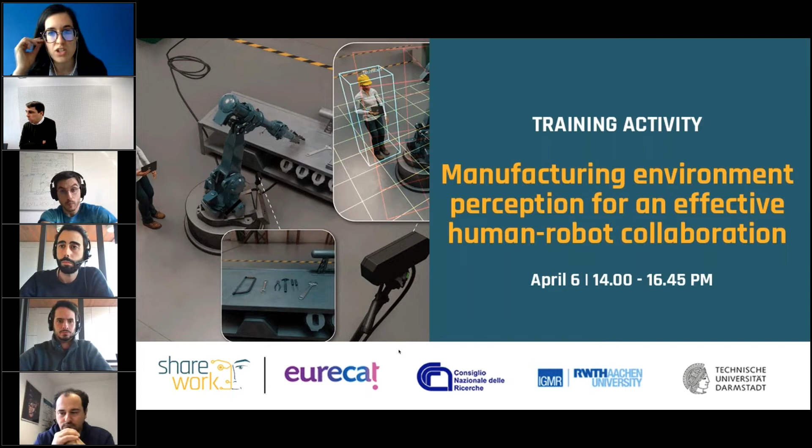So we are going to start with the first of a series of training workshops being organized by Sharework project. Sharework project is coordinated by Eurecat, and we work towards providing collaborative robotics the necessary intelligence for an effective adoption of human-robot collaboration in industrial shop floors. And this session today will focus mainly on perception.

And we are willing to present several perception techniques to increase collaborative robotics knowledge and skills to perceive, comprehend, and reason about the surrounding environment. If we go to today's agenda, we will be combining several presentations on specific topics ranging from ontological approaches to object detection, human tracking, primitive learning, and how to understand human actions for a better human-robot collaboration.

And we'll be combining those theoretical concepts together with small surveys that we will be launching in between presentations, in which we will be testing some key concepts that will be presented in the following minutes. And after that, we will also try to put as many examples as possible from the project to make sure that we can see some applications of these concepts today.

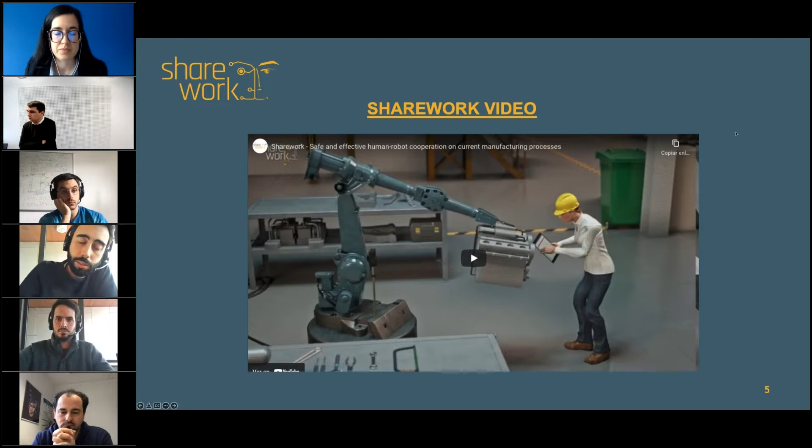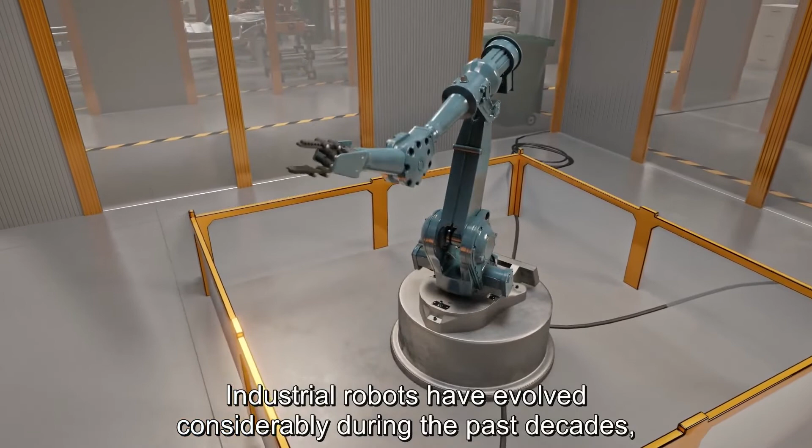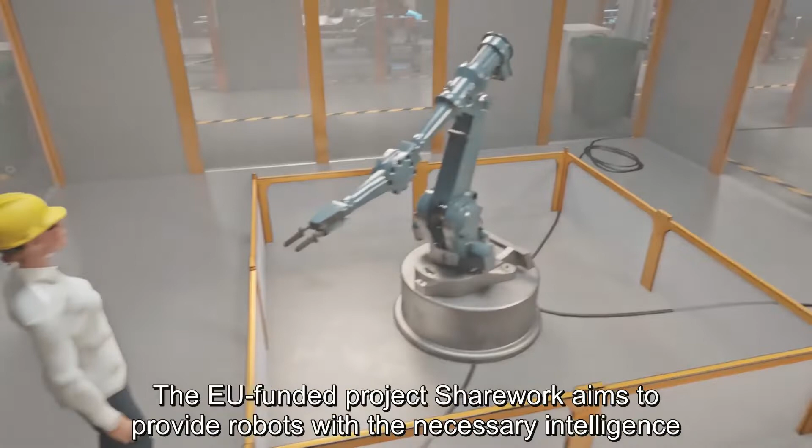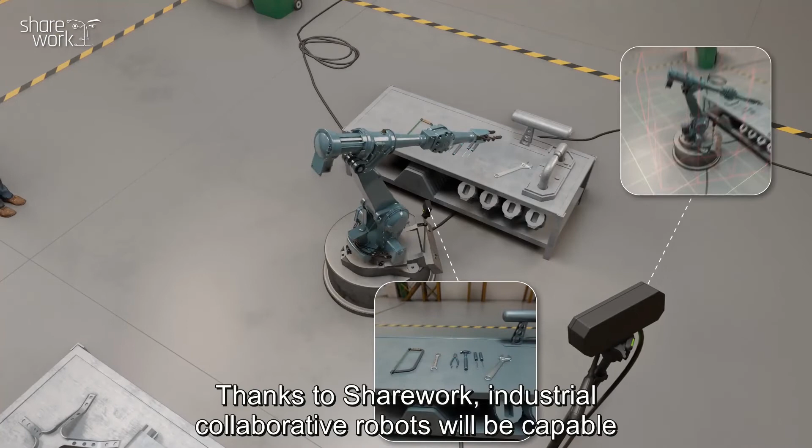So I guess we're going to see a video introduction of the project. In the age of Industry 4.0, the industrial landscape is being transformed by technologies, allowing factories to be more connected and automated. Industrial robots have evolved considerably during the past decades, improving in productivity, efficiency, and security. But they are still not flexible enough to coexist and share production tasks with humans. The EU-funded project Sharework aims to provide robots with the necessary intelligence to safely work with humans without the need of protective barriers. Thanks to Sharework, industrial collaborative robots will be capable of understanding the environment and human behavior.

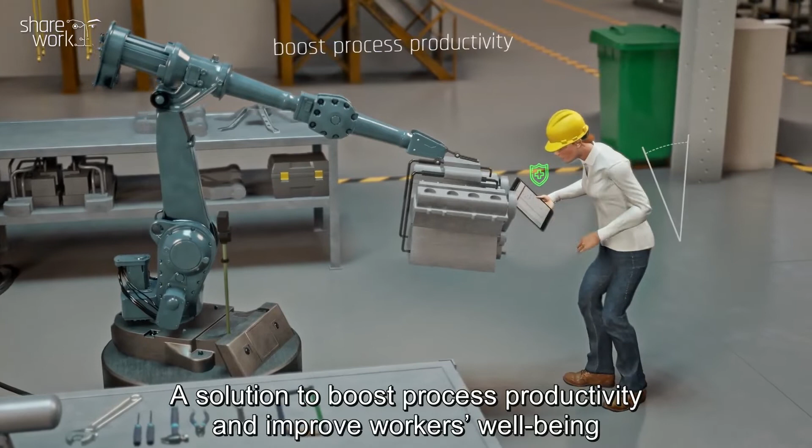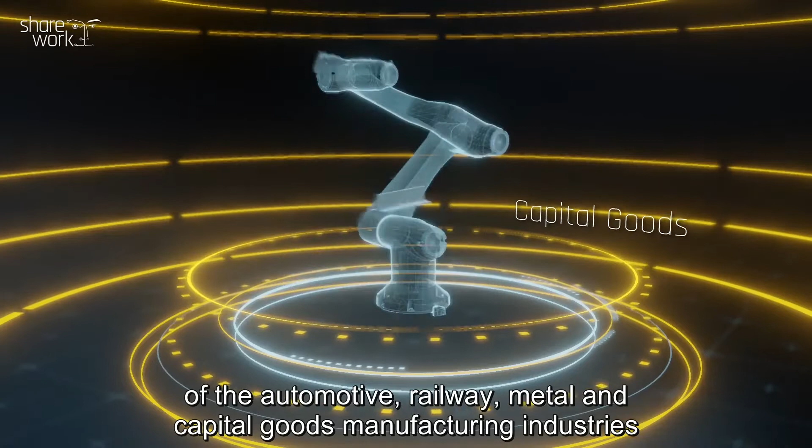A solution to boost process productivity and improve workers' well-being with better ergonomics and safety at the workplace. The resulting technology will be validated in the assembly areas of 4 different companies of the automotive, railway, metal, and capital goods manufacturing industries to evaluate its applicability in different industrial processes. A new smart robotic system for fostering industrial competitiveness in Europe. To find out more about Sharework, visit sharework-project.eu or find us on Twitter.

So Sharework is a 4 years long project, which ends this October. We are in the last 6-month period. The project had a budget of 7 million euros, and the consortium is composed of 15 partners across 6 European countries.

Sharework project is born due to the need for technology for an effective adoption of human-robot collaboration. Currently there are 2 million robots in the world, especially in the automotive sector, which EU is one of the world leaders. Nevertheless, collaborative robots account for only 5,000 units, so there's still space to grow these numbers.

Also, in the last year, there's been a boom in Industry 4.0, which has driven investment in automation and has spurred companies interested in investing in cobots. So the cobot market is expected to reach a value of close to 4 billion euros in 2023, given the high rate of return on investment.

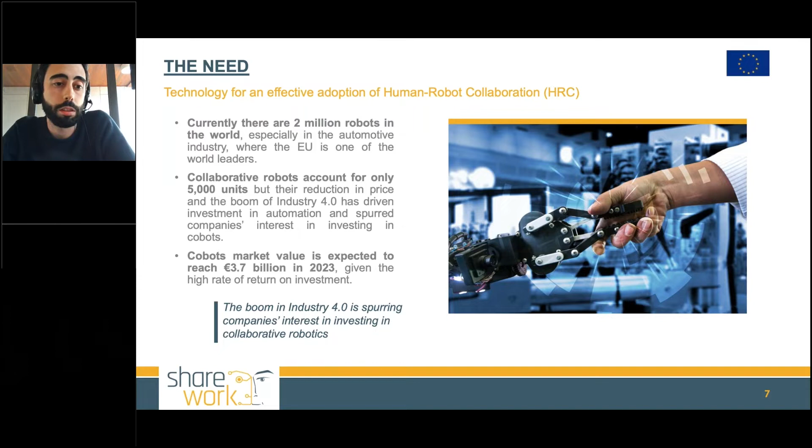Sharework aims to endow industrial work environments with the necessary intelligence and methods for the effective adoption of human-robot collaboration without fences or other physical barriers. For that, we've designed a evolving knowledge base and human-aware task planners and motion planners to control the robot behavior, as well as a multimodal human-robot communication system. We've also been developing methods for overcoming human-related barriers in order to ensure successful integration of the system into current industrial scenarios.

The developed technology will be proven and validated in 4 industrial scenarios in the railway, automotive, metal, and capital goods industries.

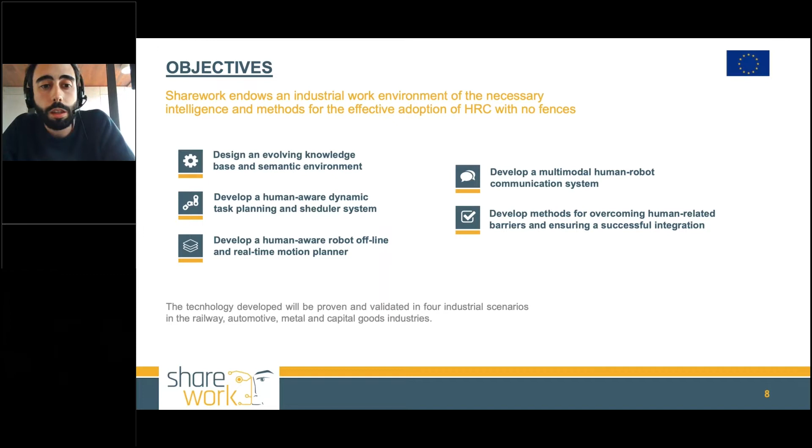Our approach consists of developing a modular solution composed of 15 software and hardware modules into 4 areas, which are perception, motion planning, safety and security, and human communication. Among all of them, there's always the human factors in order to collect feedback from the operators, which will be the final users of the developed technology, and try to improve our solution in order to fit their necessities.

As said, the solution will be validated in 4 scenarios: the railway use case led by Alstom, the metal use case led by Cembre, capital goods led by Goizper, and finally the use case in the automotive sector led by SEAT.

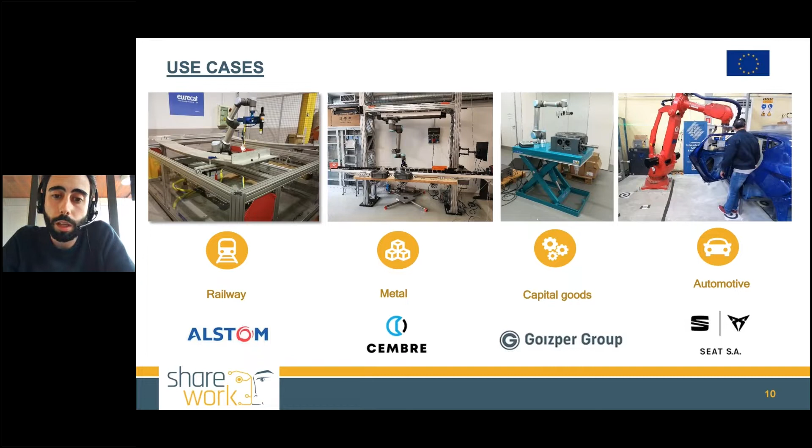So the project development was split into 4 phases. A first phase of collecting all the requirements and the conceptualization of the solution, followed by a phase in which we develop the technology to be then validated in lab environments. We finally reach the phase in which we are right now, in which we are integrating the technologies in some demonstrators located in the end user facilities, where we're going to validate our technology with real operators.

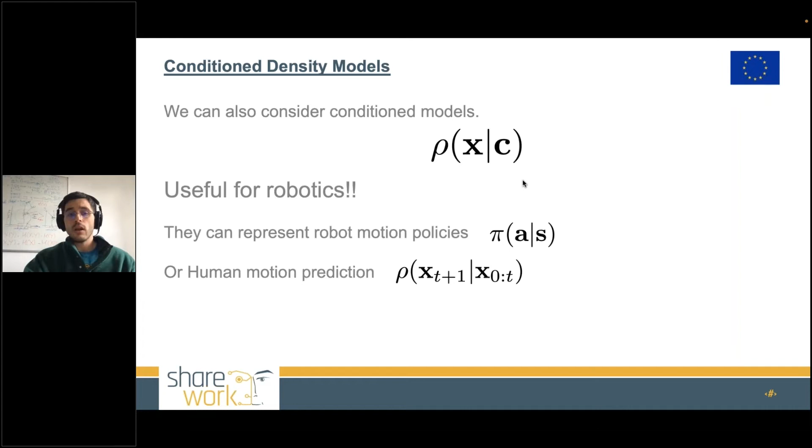Additionally, and particularly important for robotics, are the conditioned models. In several robotic tasks, we may have a situation where we want to learn a distribution that depends on a different variable. For example, let's assume we want to learn the distribution of how we should interact with the environment. Depending on the state the robot is in, the distribution of actions the robot should take should vary. Therefore, what we are learning is a conditioned distribution, a conditioned density model.

On the other hand, let's assume we want to learn a prediction module that could predict where the car is going to move depending on its current state. These predictive models are also conditioned on the current or previous steps the car has taken, and depending on how it has been moving, we can better predict where it's going to be in the future. So these models are conditioned models.

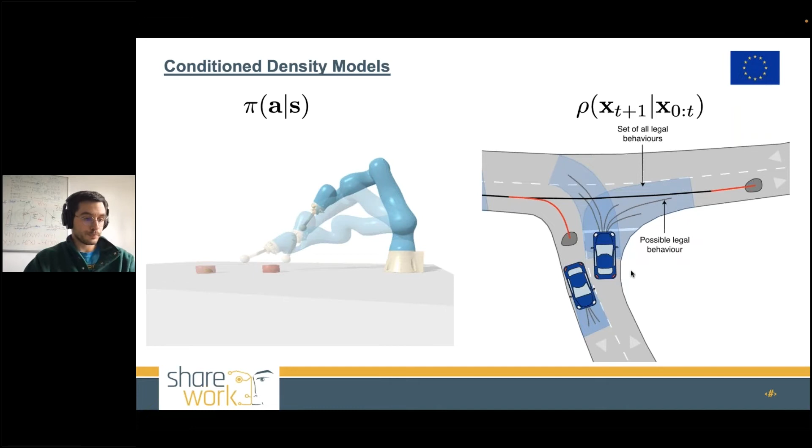So up to now, I have introduced how we can represent a model, and now I'm going to very briefly introduce how we can train them.

As I said, what we need in density estimation is a model P and a data set. Usually the approach to train these models is by maximum likelihood estimation. What we aim for is to find the parameters theta of our model that maximize over the data that we have. So it's actually over the expected value of our probability distribution with respect to the demonstrations that we have.

This maximum likelihood estimation for different possible models will change. For example, in Gaussian models, we have a closed form solution in which we can find the mean and the variance. Then in the normalizing flows, we have a way more complex distribution in which we have to do a trade-off between the entropy term and matching the data. And finally, in the energy-based models, the general idea is that even if the regular loss function we want to optimize is the maximum likelihood estimation, depending on the model we have chosen, we are going to represent this loss in a different way.

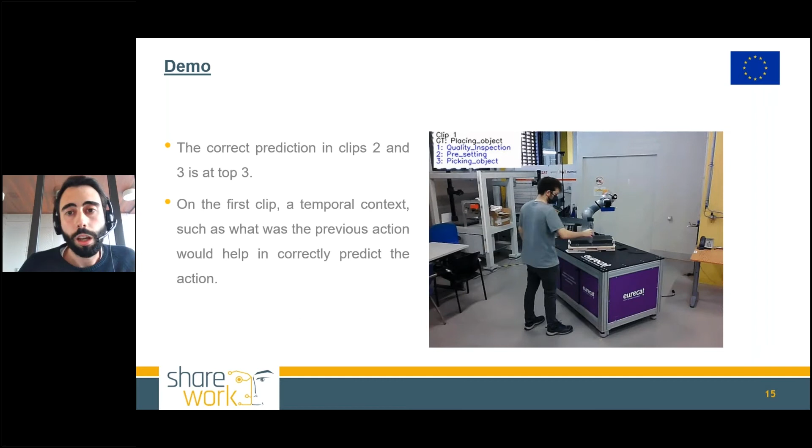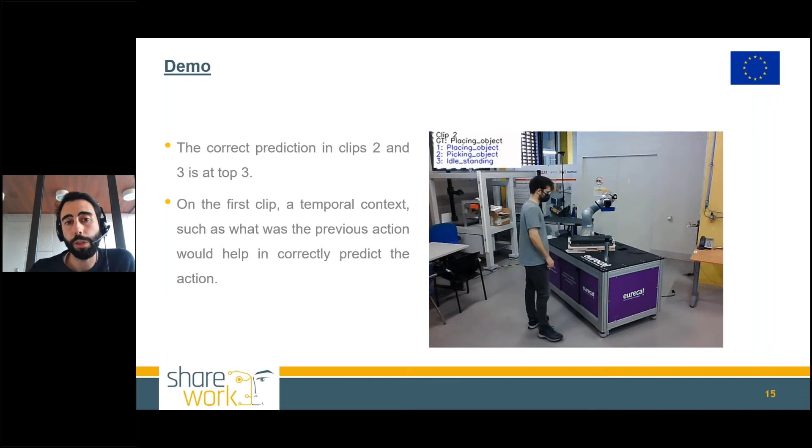In order to improve and make more robust the predictions of the AI model, we model the problem as a hidden Markov model, where the task the human performs depends on the previous task. And for each task, some objects are more probable to be detected or not.

In that case, we are using the following input: the top 3 predictions from the deep learning model, so the 3 most probable tasks that fit given the videos; the previous predicted action, so the last output of the prediction system; also the objects detected in the scene provided by the environment cognition model; and the task transition probabilities, which is the probability of the worker performing some task given the previously performed task. Also the object observation probability, which is the probability of detecting a given object in the scene when the worker is performing a given task, meaning how related an object is to the task the worker is performing.

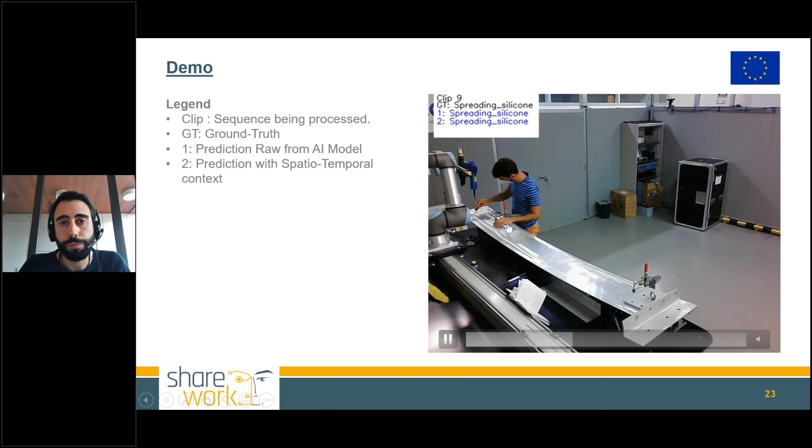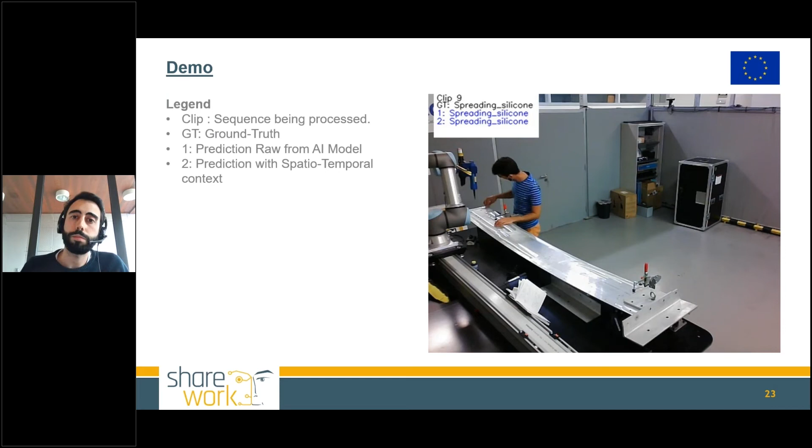So in this case, the worker is spreading silicone, and sometimes the raw prediction is not the correct one. With the correction, the hidden Markov model correction, we are getting the ground truth, like for example in this case.

And yeah, that was all from my side. Thank you very much for your time.

Thank you very much, Nestor, for this presentation, presenting some concepts on human task recognition. It's great to see how we have applied this to the Sharework project and that we already have some results, a model that will be integrated into the Sharework modular system for a more safe and effective human-robot collaboration.